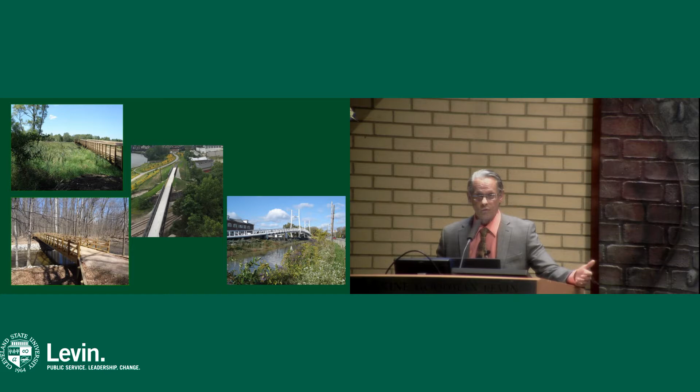We also have a lot of challenges outside the towpath, including wetlands and creeks. We have this particular couple sets of bridges going over Scranton Road and over the railroad tracks. Further south in Valley View, we have a couple of beautiful bridges that span Brook Park and also Warner Roads. We also snake trails through trees.

When we can't do that, we wind up having to warn people to watch where they're going so they don't hit a tree. We snake them through various corridors of utilities. And we take rail in the lower corner here, we see the Morgana Run Trail, which was a former rail line—a Rails to Trails project here in Cleveland.

We like to make trails as wide as possible to accommodate as many people as possible, as many types of users, but sometimes that isn't possible. Here in Cleveland, part of the towpath goes between the railroad tracks and the back of Steelyard Commons, so we only have 10 feet or so to work with.

In downtown Cleveland, as you approach, we did a trail along Burke Lakefront Airport, and unfortunately, in some cases, the utilities were right in the middle of it.

And finally, a lot of opposition in many cases, including a lot of suburban trails, where people fear trails because they think people are going to come into their backyard and steal TVs. We heard that so many times. What I try to tell people is somebody stealing a TV on a bike doesn't have to use a trail—they can use the sidewalk.

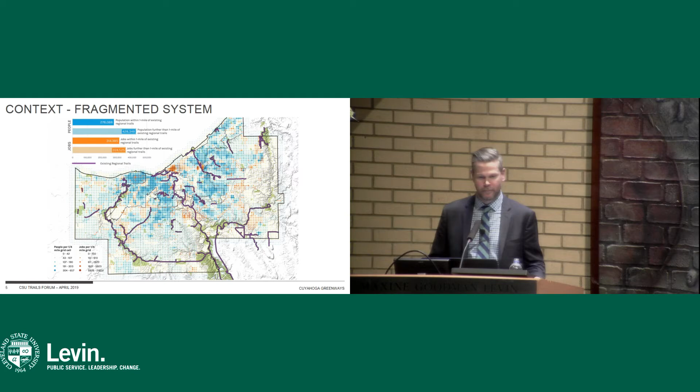Another thing to think about is the context of how our county's been developed. Obviously, as an urbanized area, there's little room for us to build what we'd think of as new greenways. So we have to rethink that in terms of repurposing existing land.

You can see the Metro Parks has done a great job preserving and expanding open space when available. But over the past 70 years, we're using twice as much land as we were for home, business, and transportation, with pretty much the same population. It's an auto-dominated area, and automobiles continue to be people's choice for transit options.

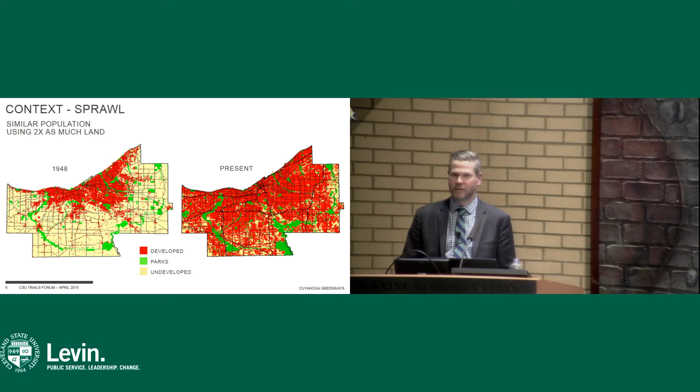With the sprawling development patterns and everything, one of the things the Greenways plan asks is how can we retrofit some of those existing areas? With limited space available, can we retrofit existing roadways or underutilized spaces to adapt for some of these urban trails?

With all that context in mind, we came up with a couple different goals for the project. We wanted to be accessible. We wanted to build a connected system that was logical and user-friendly. We wanted to be bold, driving and attracting economic vitality, focusing on building connections to key destinations, supporting tourism, retaining residents. We wanted to be equitable, serving all communities and all ages and all abilities. And we wanted it to be healthy, promoting active lifestyles and connecting to existing natural features.

Real quick, when we talk about designing for all ages, what does that mean? Starting in 2006, Roger Geller, who was the bicycle coordinator of Portland, did a study, and people have done successive studies since then. Those studies identified that bicyclists fall into 4 different categories: strong and fearless, enthused and confident, interested but concerned, and no way no how.

The interested and concerned group is the majority in most of these studies, and those people are described as curious about cycling, would like to ride more, but are a little bit afraid to ride.

In all the studies, they found the number one reason people didn't want to ride wasn't because they were afraid of other bicyclists, pedestrians, or even operating a bicycle. They were afraid of automobiles and being on the road.

Obviously now with texting and driving, you can imagine that's even more of the case. So the logic and goal in the Greenways plan is that if we make bike networks safer for that interested and concerned group, more people will use it and become physically active. So we're focusing on high comfort, low stress facilities like protected bike lanes, side paths, and trails, so we can get a larger segment of the population to use these facilities and capture that all ages and all abilities network.

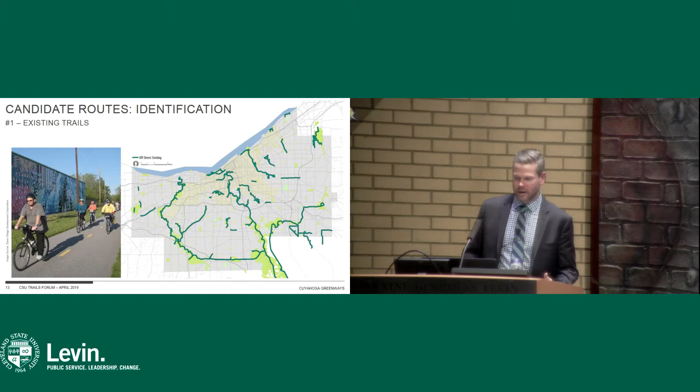So we started with the existing trail network that I showed before, and then layered on top what we're calling our regional network. The regional routes are intended to be the backbones of the Greenway system. They connect and expand that larger all ages and all abilities network of trails across the county into a larger trail and open space system.

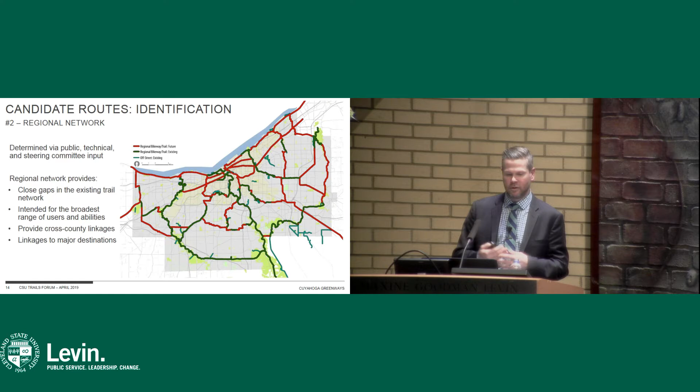They're intended to close gaps in the network, intended to be for the broadest range of users, and provide those cross-county linkages and links to major destinations.

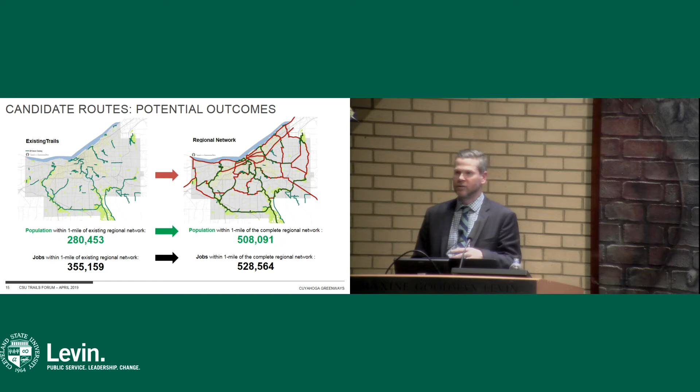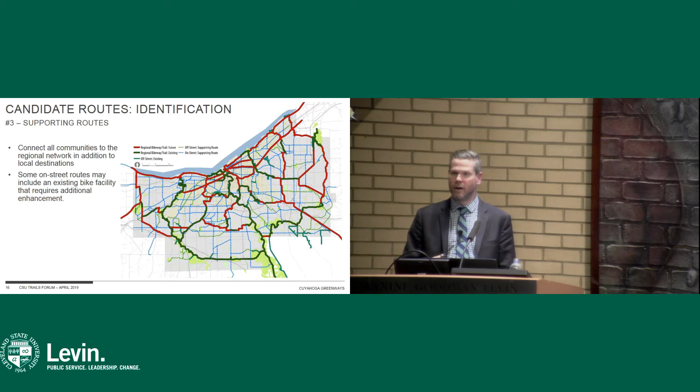But we didn't just stop there with the regional system, because there are still some gaps, and some neighborhoods don't have direct access. So from there, we came up with what we call the supporting routes. The idea of the supporting routes is to support the regional network—providing neighborhoods local connections to local destinations, but also giving them access to that larger regional network, so they can use it both for local daily trips and as part of the larger regional system.

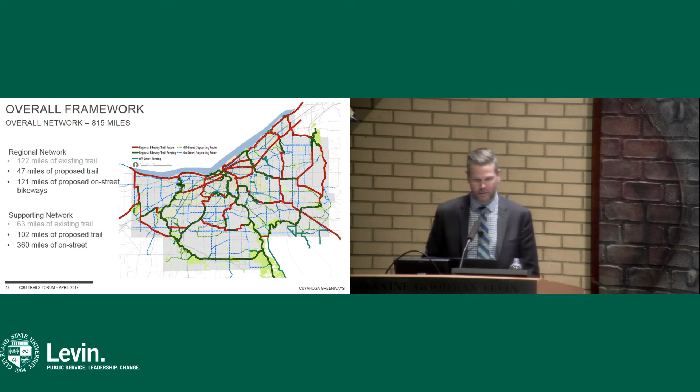So the total overall framework is about 815 miles of both existing and proposed facilities, with about 160 miles of regional trails proposed and about 460 miles of supporting route trail network proposed. So the second step, now that we had our candidate network, was to identify whether those candidates meet our goals.

How do we evaluate each route to see if it meets what we're trying to achieve through the Greenways plan? The project team, steering committee, and other stakeholders identified 8 core factors that reflected priorities, opportunities, and benefits that future Greenway routes could provide.

We took dozens of data sets, mapped them, did technical analysis, and reviewed which data sets and which corridors met the goals.

An example of that was population density. We took all the data sets and aggregated them over a quarter-mile grid, so we'd have a consistently sized area for evaluation across the entire county. As each proposed route passes through the grid, it's scored based on how well it meets that core factor criteria. Routes scoring in the top 20% or the bottom 20% were usually highlighted.

Here's an example of this method using population density. The top 20% of candidate routes serving the highest density are shown here in red. We did this with every core factor across the entire county and the entire network. So this is what that looked like.

Following that population density example, 800 miles of trails and over 1,300 candidate route segments were evaluated using data sets that made up the 8 core factors: trail access, park access, transit access, mobility, social equity, jobs, destinations, and habitat.

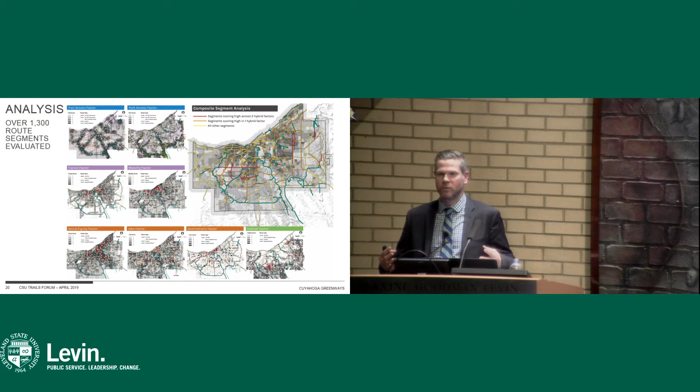From there we took all of that analysis, even did what we call the hybrid connection analysis, and compiled those into a composite segment analysis, identifying which routes scored high across multiple core factors multiple times.

With all of that wrapped up, after evaluating all the routes, we want to prioritize a smaller set for implementation. With hundreds of miles of routes proposed, it was a good idea to identify those that meet many or all of the project goals, understanding some routes may move quickly to implementation while others take longer because they're more transformative projects.

So what are our results? We came up with a prioritization plan, which is the culmination of this regional collaboration, route identification, and technical evaluation.

It takes all of those 800 plus miles and 1,300 route segments and boils them down into 69 named projects, or about 240 miles, divided into 3 categories.

What we're calling critical gaps are just that: critical gaps. They reflect shorter in length, potentially high impact projects that stitch the existing network together quickly.

Regional links are intended to provide new cross-county, multi-jurisdictional connections and access to key destination points. Last are the key supporting routes, which reflect strong local connections or routes that scored highly across our analysis. This is our prioritization plan of all those 815 miles, some of the key routes to be implemented.

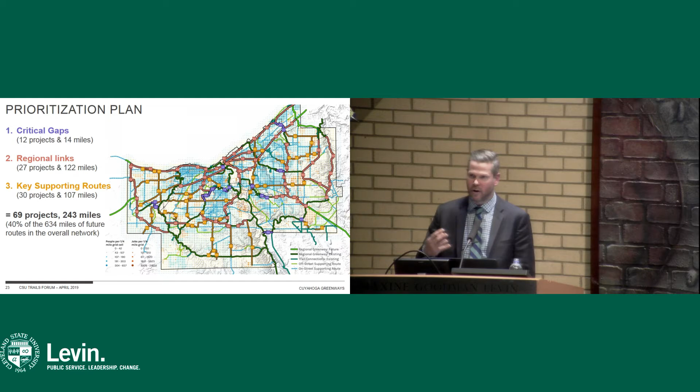When we think about our Greenways plan, we think of it as being flexible. It should be used as a guide for moving forward. We're seeking to highlight notable connections in the framework, where existing gaps are, and to identify aligned partners and previous plans for some of these projects.

What phase is the project in? Is this the first time it's been identified, or has it been studied before? Part of that helps with resource allocation. Is there a way for potential multi-jurisdictional coordination amongst cities? Can projects be bundled together in one funding request, or bundled as part of other infrastructure improvements as we move forward?

As part of this, and you'll see from a lot of the great work these guys will show you today, we know there's not going to be one size fits all solution. A lot of this is context sensitive, based on a variety of partnerships and local support. When it comes to partnership and coordination, we already have some momentum building, and that's going to have to continue and be critical. One thing we're doing at County Planning is working to integrate all of these routes into our local master plans.

This process can help confirm alignments with the public and local community, but also help determine alternatives if they think another option or route is better, or another facility type works better. This continual support and feedback through public engagement helps the plan move forward and continue to evolve.

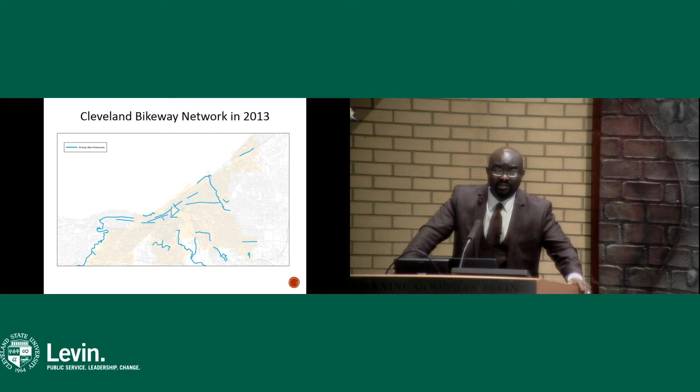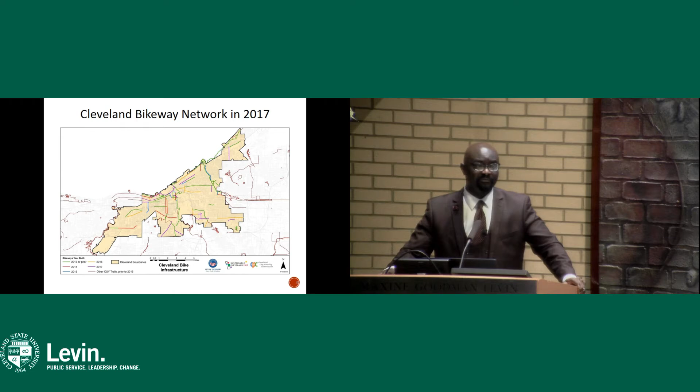Again, it's not one-dimensional, it's dynamic, where we have multiple options for people to have adequate bicycle and pedestrian amenities. Just to give you an example of where we're going in the future, one of the really key assets now that the city has is Opportunity Corridor.

One of the reasons Opportunity Corridor is an asset now is because you have a dedicated connection for cyclists, with an actual dedicated trail leading from University Circle into the Slavic Village neighborhood via Opportunity Corridor. This $331 million road investment is complemented by an actual dedicated trail connection, and that was not intuitive - it was a point of advocacy by the city and several partners.

The other piece when we talk about rethinking our streets is focusing on neighborhoods. This is the Thrive 105-93 initiative, really building off of Opportunity Corridor, trying to link challenged neighborhoods like Glenville, as well as the Buckeye neighborhood, to investment opportunities in University Circle and others. One of the ways we felt that could be done is making sure our street was multimodal and offered opportunity for pedestrians, cyclists, public transit, as well as the automobile.

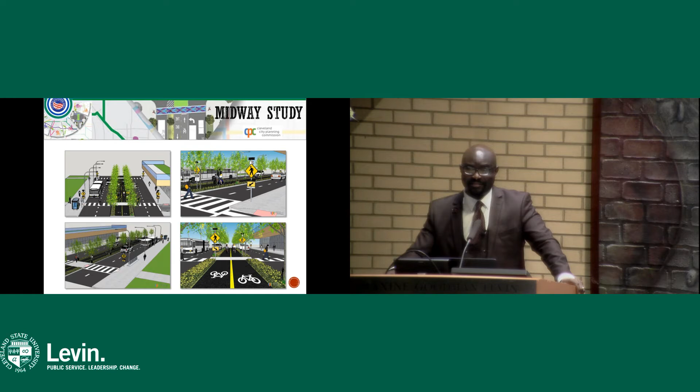I'd be remiss if I didn't acknowledge former staff member back there, Arthur Smith, who you may all know, who worked diligently with us on this project. This is something that we're really excited about and really proud of.

The other example of the future direction we're going is West 25th Street. It's significant because of significant land uses and investment happening there, connecting assets like the Detroit Superior Bridge, which connects to the Market District area. We're making sure West 25th Street gets a road diet, becoming not just for cars getting to work or hopping on the Shoreway, but a place for bikes, pedestrians, and public transit as well.

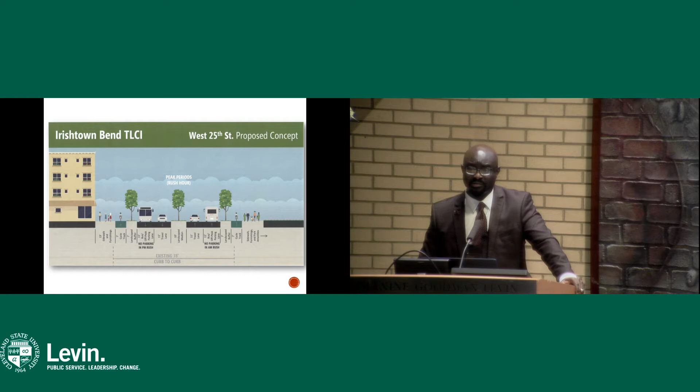These are concept images of what we want that corridor to mature into. You can see trees added, dedicated lanes, two lanes of traffic coming and going, but also development that would flank the corridor. This is right around Irishtown Bend, which is slated to be a hillside park taking advantage of significant city views.

With respect to process and continuing the momentum, we're going to do a few things over the next couple of years. We aim to complete the bicycle master plan update in 2020. We want to add at least 15 miles of on-road bike infrastructure, building off investments provided through CMAQ. We also want to continue helping advance Cuyahoga Greenways, an important initiative that scales up many efforts taking place.

We also want to focus more on protected bicycle infrastructure, so you'll see projects in Cleveland with actual protected infrastructure. We're focused right now on Fulton Road, where Church and State, a multi-unit investment, is going in on Detroit Avenue. Most recently Pete Snavely made a significant investment, and Fulton Road is being reconfigured to have protected dedicated lanes, particularly between Franklin and Detroit.

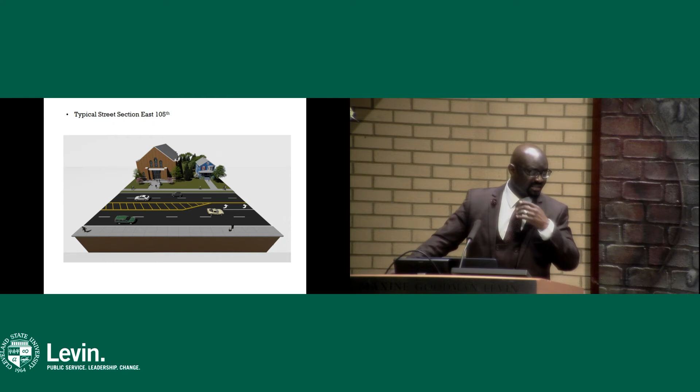When we talk about making sure our streets become multimodal, one thing we looked at was 105th Street — examining existing conditions and beginning to ideate around possibilities. I use 105 as an example, but it's indicative of many streets throughout Cleveland where we have to rethink how we invest and what infrastructure to put in.

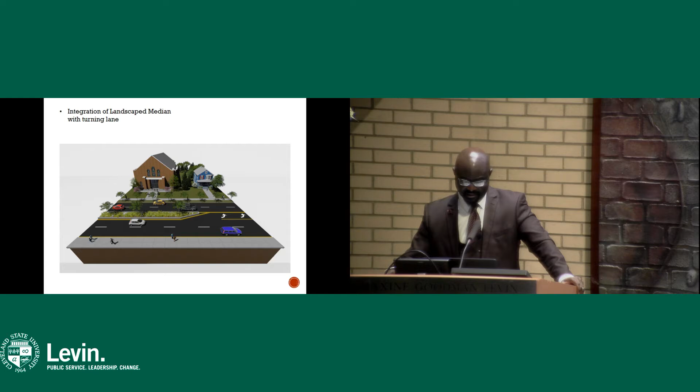We looked at scenarios to green up the street and create a more desirable aesthetic on 105. We also played around with low-cost, protected dedicated lanes to try to get a configuration allowing for multimodal transportation in a safe way.

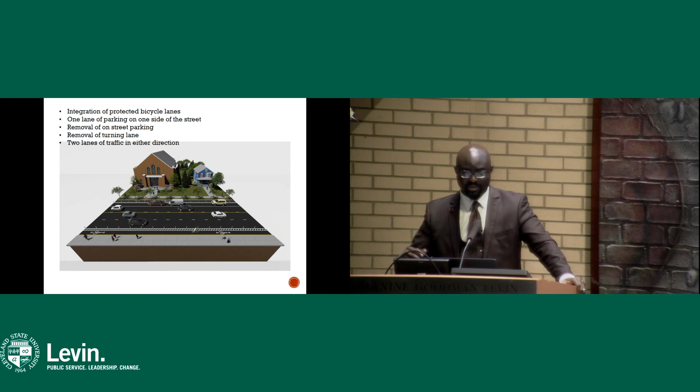We also looked at scenarios with three traffic lanes and a protected cycle track, shown in one of the previous slides. Different streets and corridors have different widths and can accommodate different types of scenarios, but this gives an example of the universe of roadway types we're starting to explore at the City of Cleveland.

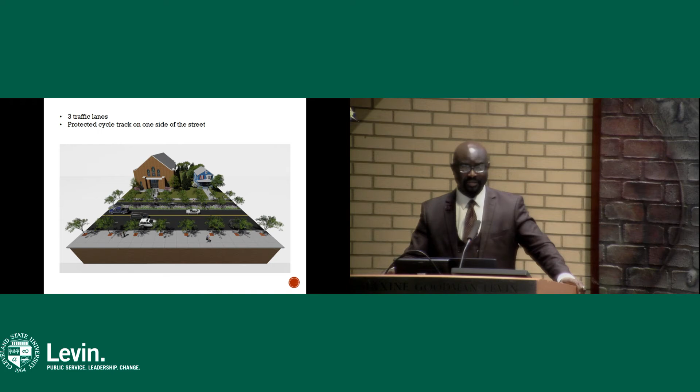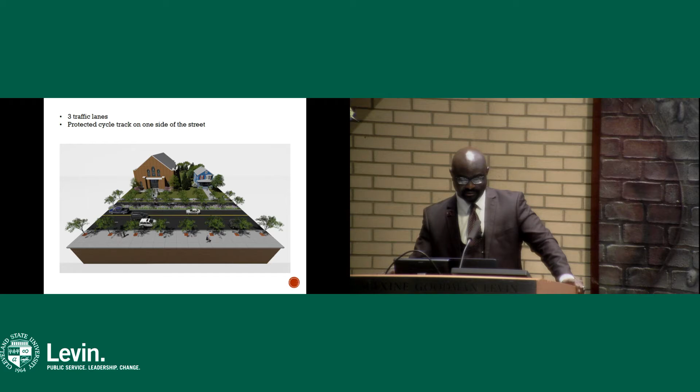For those who haven't spent time with our traffic engineers and others, you should be clapping that these conversations are being held — so I'll clap for us. We're thinking differently, and part of why I named this presentation New Directions is because we feel a shift in culture and see our mindset changing. But because public resources are always limited regardless of the economy, we still have tough decisions to make. Still, I believe we're moving in a very good direction for the City of Cleveland. Thank you.

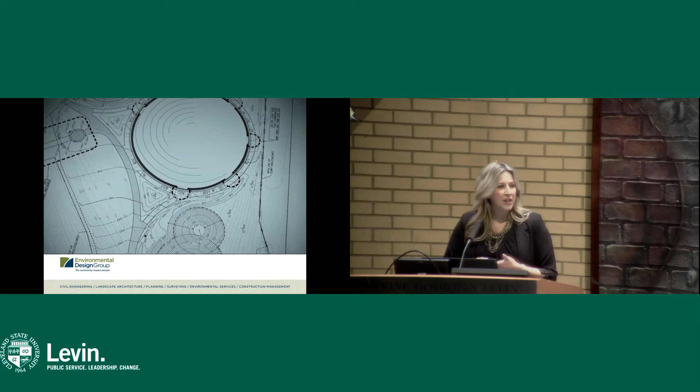So what does this look like, how do we do this? We'll walk through the process, from a very high-level plan, down to an alignment study, down to an actual schematic layout, and then you get to the CD set and things come to life. That's the aha moment of going from having a drawing to literally coming to life, and that's why we come to work every day, to make sure Northeast Ohio and the state of Ohio, but especially Cleveland, is a better place. That's something we cherish.

So what does that look like? A lot of us have been to the Solstice Steps - yes, there's a trail there too. That's exactly what we're talking about: celebrating destination experiences, creating cultural infrastructure that people identify with, that becomes its own sense of place. It becomes its own 'there.' It becomes its own Instagram handle. It becomes a place where people walk their dogs, do yoga at 6 a.m. - we never anticipated that, but apparently the steps do well for it. Those are the types of things where people make spaces their own and have a strong identity with them.

A big part of our job, as everyone on this panel can attest to, is maximizing our limited resources without expending extra dollars. How do we create those 'theres' and think differently about how we use materials and money? An example I'll talk about is a bit west of us, the Erie County Sandusky area.

We talk about this at a super high level: an 80-mile regional trail. Then we hone in, looking citywide. This project is moving forward - it's a 12-mile lakefront trail network. For those who know Eric Wobser, the former Ohio City CDC director, you know about outstanding leadership and things that can turn around from 2014. The amount of infrastructure we are investing, and the dollars we are spending with his staff and leadership, is absolutely outstanding.

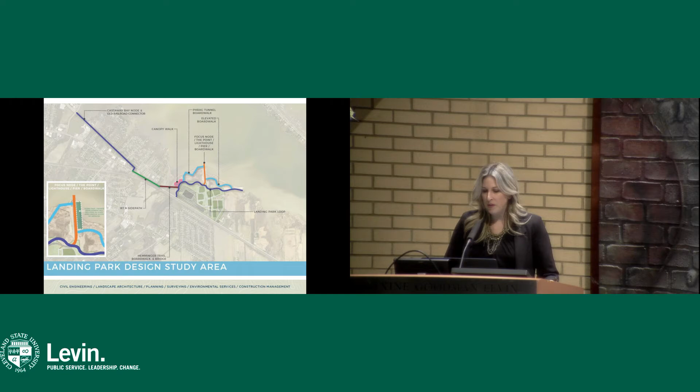So we talk about setting the brand, thinking at a high level: how do we create that 'there,' having something that applies all the way through? The stripes you see on the Sandusky Bay Pathway image are our Follow the Yellow Brick Road - that's going to run along all 12 miles. No matter where you are, other than our boardwalk areas, you always know: blue stripe toward the lake, green stripe toward land. This is our Follow the Yellow Brick Road - you know you're on the Sandusky Bay Pathway. If you've been on the towpath, it's the exact same concept.

The mile markers, going all the way from Cleveland down through Summit County, even out of our region, let you know that you're on that towpath because of those identifiers, and that's what we want to make sure of. Lakefront Greenway is a perfect example that we're moving forward with that.

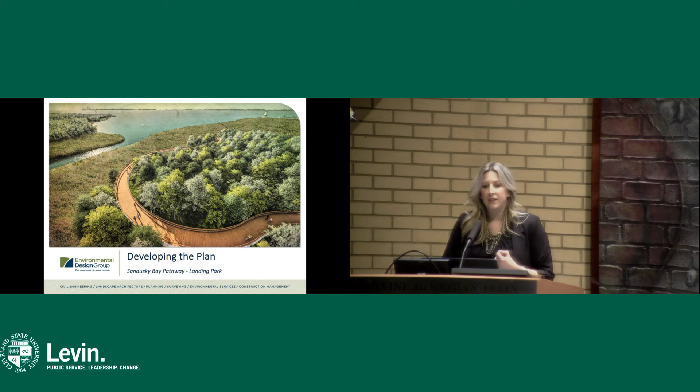And then we start developing the plan, thinking about how do we turn this alignment into something that people can access, to create ADA accessible experiences that aren't just for able-bodied folks, but for anyone that wants to experience what that looks like. So creating, again, those destination experiences, touching the lake, I think that's something Cleveland can identify with.

Our greatest asset is right outside our door, and yet so many people don't know how to get to it. So how do we create those experiences? How do we create those areas that people want to be at, whether it's a transportation function or a recreation function, how do we get people to it? And if we can't put our toes in the water, how do we make people feel like they're experiencing it? That's something that's very important.

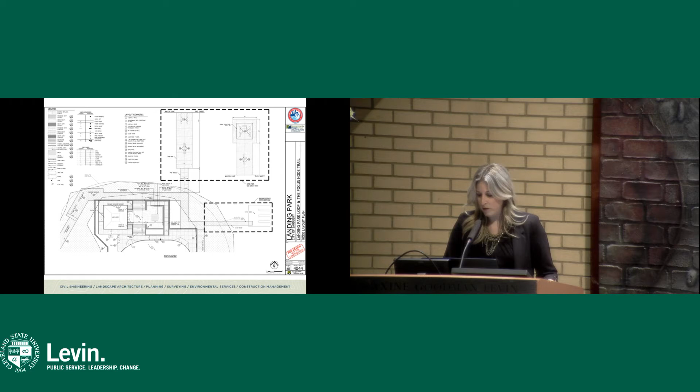This project in particular is an $18 million project. We are within full design right now. That lighthouse you just saw, this is a page from the plan set, but we are actively moving forward, and we expect to break ground in a year and a half.

The big thing I am very, very proud of for this project is that, basically by happenstance, we have an all-female-led project team on our design. Going all the way from structural to landscape architecture to ecology to project manager, we are female-led. So the ladies of Landing Park, that's definitely something that's kind of cool. Again, unintentional—we want the best qualified people, and yet it's a pretty good crew that we have there.

So Lakefront West, this is a pretty major undertaking that I think every single person on this panel was participating in. This was a $41.5 million roadway rehab, a downgrade from basically a highway to a streetscape boulevard, a trail project, a bridge replacement project, a bridge rehab project.

But this gets us all the way from West Boulevard and Lake Avenue with an off-road trail to the West 25th and Detroit intersection in Ohio City. This was definitely something that, from a time frame standpoint and from a creativity standpoint, especially as it related to stormwater, within a one-year design timeline, was outstanding.

EDG partnered with Michael Baker International on this, and this was a quick-moving project. With the City of Cleveland's agreement with the Regional Sewer District, we entered an MOU to treat 100% of the water quality, which is not required, but with it being a lakefront program, we all thought it was important to do that.

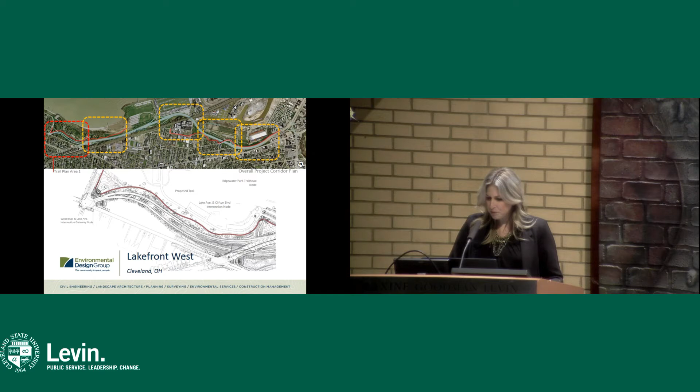With the fast-paced nature of this project, going from very conceptual design into all the different design review, neighborhood review, city planning commission, et cetera.

How do we create those areas that people identify with? The nodes that you see in front of you create a sense of place and a 'there.' They also create safe pedestrian crossings, traffic calming, and beautification around you, which makes you slow down naturally as a car. That's very important when it comes to understanding how people use places and how people navigate to and from them.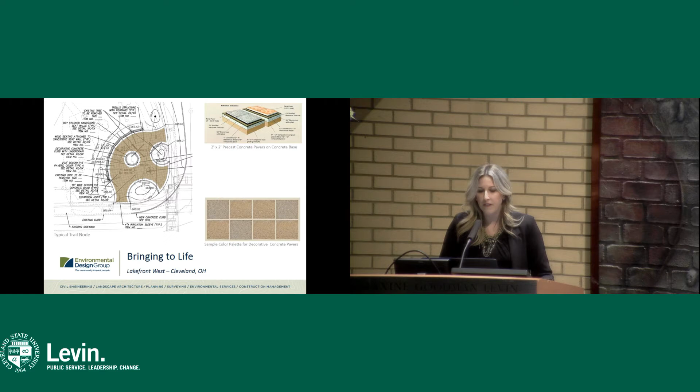And then bringing those projects to life, in less than 12 months, that was something I'm just very, very proud of—the project team and everyone involved in that. That was a pretty cool project. The cool thing about this is that it's out there today: a little over 2 miles of trail that leads through Edgewater Beach as well as Beach House.

You talk about these destination experiences—the Cleveland sign, something so simple, yet people identify with that. You see on Instagram, Twitter, Facebook, etc., social media, people identify with this place, whether you're in Tremont, whether you're downtown, whether you're in Edgewater. There's all sorts of places where this land that we love, people identify with that.

It can be as simple as a sign that has that backdrop, whether it's the Industrial Valley or downtown, but creating that kind of cultural infrastructure is something we very much value. The nodes, again, create that sense of 'there'—a place to rest, but also a place that people identify with.

You start seeing this cadence of places, the same materials, the same application, all ADA accessible, AASHTO standard, et cetera, and yet within the same budget, making sure that we're creating places and destinations that people can meet at, can identify with.

This photo was actually taken by Brian Zimmerman right after the Metro Parks took over the lakefront parks. This was on a Saturday. Brian was out there with all of his senior staff right after the governor signed the dotted line and had everything transferred. The cool thing was this view—they were out there with the finance director, accounting, and the service and maintenance manager, talking about what that could be. That's my dog, Buddy. Buddy and I were out there on Saturday and ran into Brian and all of his staff, and all of that brush got cleared away.

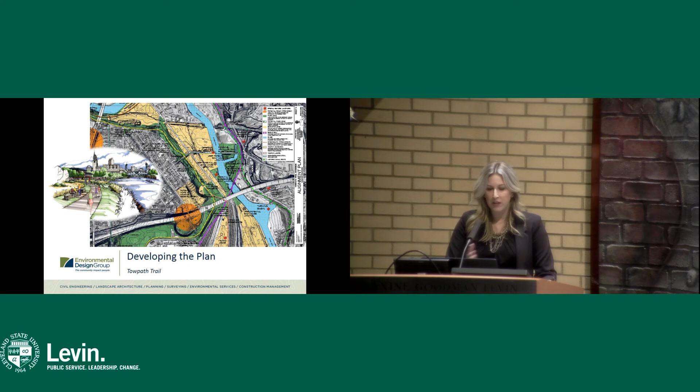So developing the plan. EDG is very proud to have developed a lot of the Towpath Trail from a conceptual level as well as from an engineering scale. The plan you see in front of you is from 2002, I believe. We did most of Summit County's as well. This is something well before my time at the firm that we've been involved with. And we talk about developing the plan and selling the vision.

I'm going to talk a little bit about the towpath mounds and what it took to implement them. This was a project where, as we were sitting in a meeting, we realized we had 44,000 extra cubic yards of just okay fill—not sure if it's contaminated or not. Do we pay to have it hauled off site, or do we keep it on? As we were supposed to be paying attention in the meeting, Mr. Jeff Kerr was doodling and came up with this concept: why would we pay to haul all of this off if we could potentially adaptively reuse it on site?

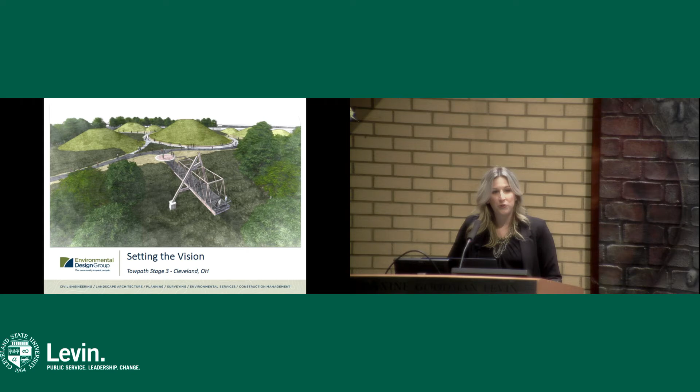That was how a sketch of the towpath mounds in an hour-long meeting turned into 1.5 years of our project team bringing this to life. Iteration after iteration—we all joke that the towpath mounds was a cat with almost nine lives. It was reaching its end.

This came from all sorts of things that came up during design as well as during construction. Every time it felt like we were hitting a hurdle—one moment we realized the ground wasn't stable, so we had to regrade the entire piece. On the other side, the bridge had to be raised, and therefore the entire site had to be raised, and everything had to be regraded again. Then we found out during construction that the entire site was not geotechnically sound—full redesign. Again, this is not something we're moving forward with without contract amendments.

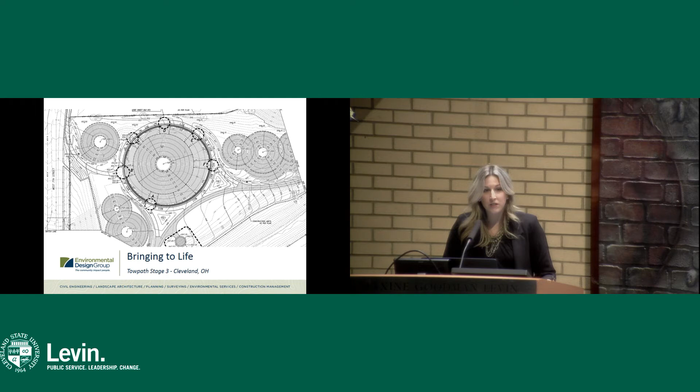This is the entire project team making sure that this vision comes to life and creates something that all the work people put in can be celebrated. This is now open. We haven't droned it lately, but I think people are now seeing that.

People are realizing that the intent of the mounds is to actually play on them. We've all heard of nature play as a playground. This is a much larger scale of that. We purposely made sure that every single one of these mounds is climbable, and that was important.

It's meant for people to try, some of them are steep. I've been on the big one and it's steep, but it's climbable, and it's meant for people to explore, to celebrate our history, to look into downtown, to look into the industrial valley.

The intent of the mounds was to mimic the industrial valley piles, whether it's coal, sand, or salt. Looking at that, from the top you can definitely see what that cultural infrastructure is, kind of mimicking it from across the valley. So, other than that.

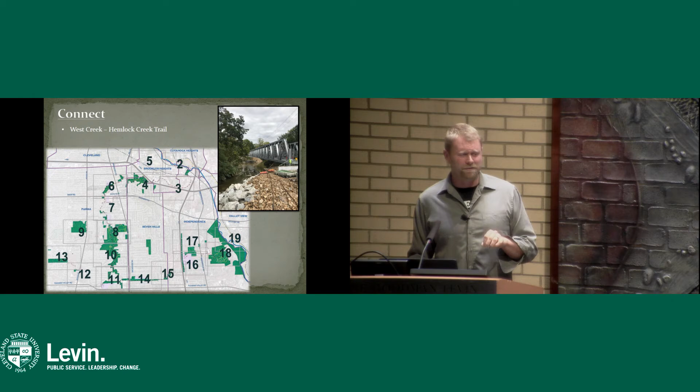When Trust for Public Land and Cleveland Metro Parks did their economic impact analysis a couple years ago, we saw residential property values rise. We saw the connectivity to trails and greenways as now a marketable value for the city of Parma. This is one of the biggest puzzles—I can tell you every parcel along every one of those numbers that we still have to connect, but piece by piece it's coming along.

Freddie had a good statistic of how many people are in proximity of trail systems. Within West Creek Reservation alone, if you're standing at the Watershed Stewardship Center, you're within 1 mile of 44,000 people, 17,000 residences. But Parma still only has 5.4, 5.5 percent green space. As we start to connect these regional routes through the County Greenway Initiative and through initiatives of Cleveland Metro Parks and partnerships with the city of Parma and so many others, the trail system really comes to life.

So when that 324 acres was really born, it was this chunk of land off of West Ridgewood, Broadview State, Pleasant Valley, but it wasn't connected. So we've been working over the last 22 years to literally keep buying and undeveloping certain pieces, whether it's people's backyards, side yards, rear lots, access easements, to get across a valley that was truly just forgotten. And now we're topping 500 acres in connectivity into 2 different communities.

So the initiative started by citizens, now staffed by 4, and with partnership of Cleveland Metro Parks and the City of Parma, you're now aiming to connect over 90,000 people within 1 mile of West Creek Reservation. And if you look at West Creek, it's this tiny little green map on the Emerald Necklace, but it kind of sits in the heart of it.

So you want to see it connect to the towpath to the east, to Big Creek Reservation to the west, north again to the towpath, and have that regional network that Freddie really touched on, connecting down Broadview Road toward the zoo to Lower Big Creek Greenway.

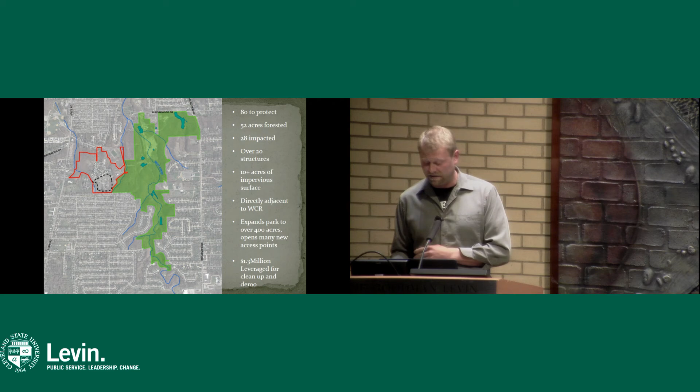That's kind of what it looks like now on the left-hand side. That's where the cottages were - keep in mind, these cottages were 10,000 square feet apiece, and there were 16 of them, plus this old school and clock tower.

So when we talk about urban preservation, there's a lot of reclamation involved - undeveloping things that shouldn't be there anymore, and turning it back into something that helps provide function for our overall watershed health.

On the eastern edge of the terminus of the Greenway, we've been proposing to meet the towpath for a couple decades. We originally started this project when Kucinich was in office - so when somebody said trails take time, hell yeah they do. We were going through two different jurisdictions and federal land, and once you're in federal land, it's a lot of fun. We also had to work around significant infrastructure.

This is a 1.7 mile trail connecting Brecksville Road next to the Cleveland Clinic Business Operations Center. Dick Pace with Cumberland Development used that as a carrot to attract Cleveland Clinic - they were going to have trail connectivity to the 110-mile spine of the towpath right out their back door. This trail will be opening in June, and I might even drop Kucinich a line to let him know.

This was part of funding we leveraged through an earmark through SAFETEA-LU a couple transportation bills ago, and Clean Ohio Trails, and the City of Independence put in over $1 million cash - an amazing investment by a city that you don't see very often in the suburbs. This trail will be a true asset, and it's one of the National Park's largest community connectors.

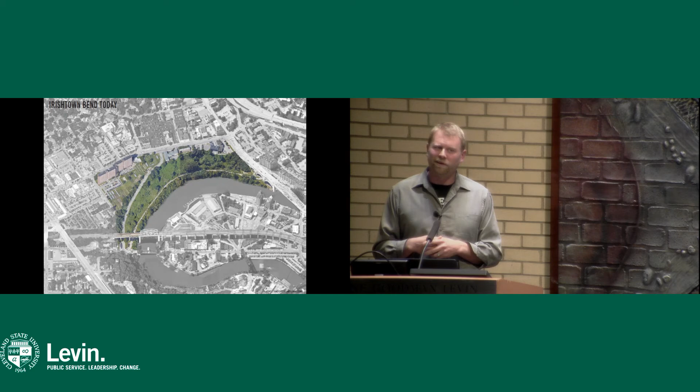If you were sitting at Merwin's Wharf and looked across the river, it's a big green space with a lot of issues — not only geotechnical, water, and infrastructure, it's a socioeconomic issue. This is going to be one of our most complex puzzle pieces to acquire, reclaim, and restore, and hopefully integrate into somebody else's hands because we are four people.

I've already mentioned the connectivity of this to Red Line Greenway, the towpath, Lake Link Centennial Trail. To me, reclaiming Irishtown Bend is a no-brainer. Yes, it is a risky venture, absolutely. But if we turn away from risky ventures, we're not going to fix problems like Irishtown Bend, the reconfiguration of Franklin and 25th, the stabilization that supports 20,000 jobs, $3.5 billion economic impact. So when you look at Irishtown Bend and see a trail, you also have to realize it is a sustaining factor of the river and the shipping industry, an economic driver and catalyst.

It's funny how many developers — you see those little white posts poking out of Carter Road down there, and you know they're ready for their next series of townhomes. People want to live next to the trail and the river. They want to be connected to Ohio City and downtown. Irishtown Bend is just going to be a further catalyst for development in that region.

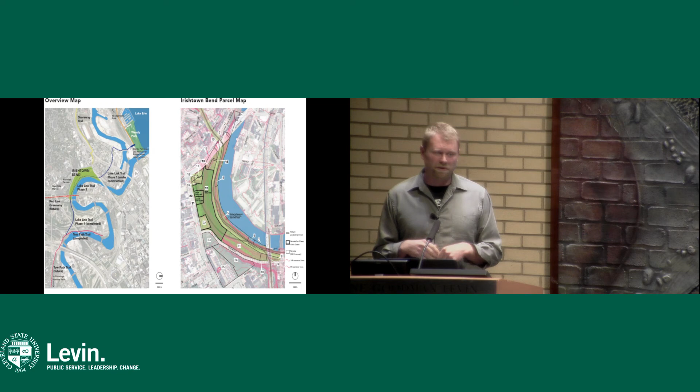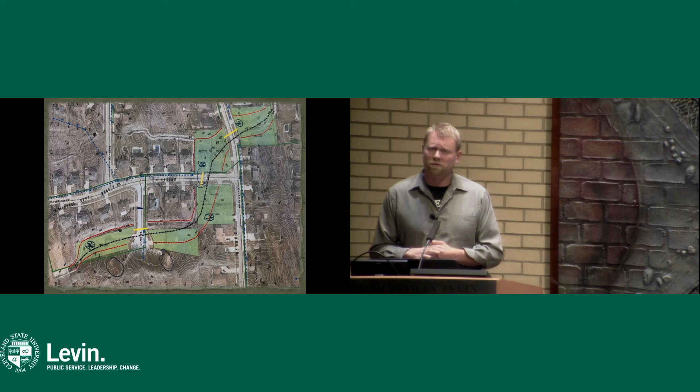This is another picture in Hemlock Creek in Seven Hills, where I've had to go door to door like a salesman, convince people I'm not crazy, and ask them to move until we can restore the ecological integrity of Hemlock Creek. This is just a facet of our work.

The reclamation has so many — everyone says it's expensive to buy buildings and knock down buildings. Yeah, it is, it's very expensive, but the long-term approach is absolute, and we're not putting a Band-Aid on it anymore. When we fund the FEMA program and FEMA bails out people who flood, it's just a cycle that's vicious and costing us long-term. So quit building in the floodplain and work with us on acquisitions in the floodplain.

Neighborhoods, people don't understand it. They see us doing an acquisition and boom, they assume park, trail, basketball courts — it's misinformation. So getting ahead of the game, as Michelle touched on as well, getting our part of the Greenway initiated means dealing with people, asking the right questions, getting the right information out there, doing your background, having your due diligence solid. You consider your jurisdictional considerations, your management capacity, the partnerships and arrangements, and the messaging to people.

You're not always selling the why, but you're also selling the whom. My staff always says I nag till acquiescence. Working with landowners in these areas, it's an approach we have to take over and over: put the right information out there, get understanding on the ground, work with them on acquisition, piece together greenways. It has that multiple-pronged effect of protection, restoration, and connection. So protect, restore, connect is kind of what we do.

I'm trying to talk fast because I know it's 83 degrees and we want to get out of here and have some fun. So I'm done.